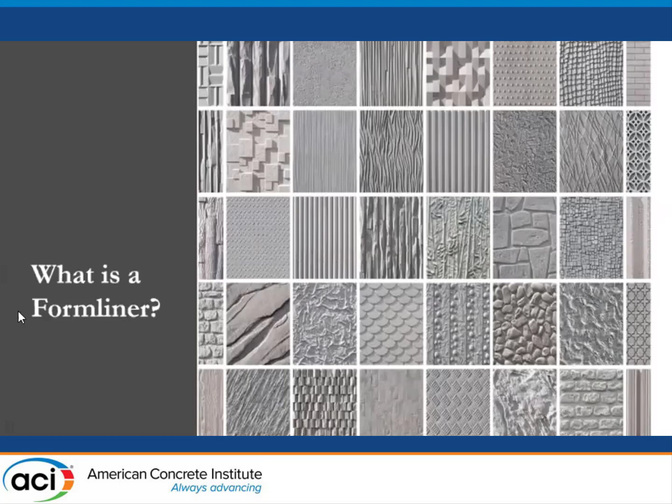A Formliner is essentially a mold. I've told some people, think of it in terms of the old Jell-O molds, when you want Jell-O to take a certain shape. But in this case, of course, we want concrete to take on the shape so that we make concrete look like something other than typical concrete. It's used to achieve a variety of designs. It can mimic virtually any traditional building materials. And you can also create a lot of artistic impressions.

From an architect's standpoint, of course, it's the way that we help you create your aesthetic vision, because we want you to look at the concrete and look at the finished project as being art. And I want to show a few projects that we've helped architects achieve that with. This is a custom project from Fremont, California, and it uses several standard Formliner patterns along with some customization. The images were CNC'd in this case.

And I tell a story about this one. I was told when this project was in development that it was in Fremont, California. And when I said I didn't know much about Fremont, they said, you know, this is Tesla. So for the next 2 years, I told everybody I was presenting to that we had a Formliner project with Tesla, only to find out when I was having dinner with the colleague that had this project after a couple of years that this is actually about a mile from Tesla. So it's not nearly as impressive as it was when I put it in the presentation, but it's a nice custom project and I still like to keep it in here.

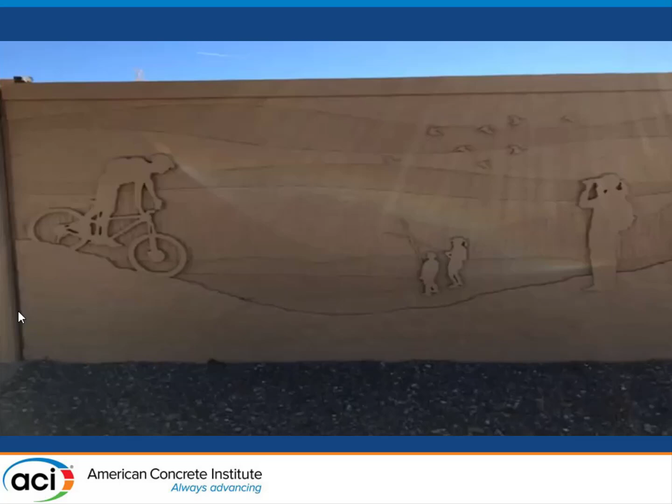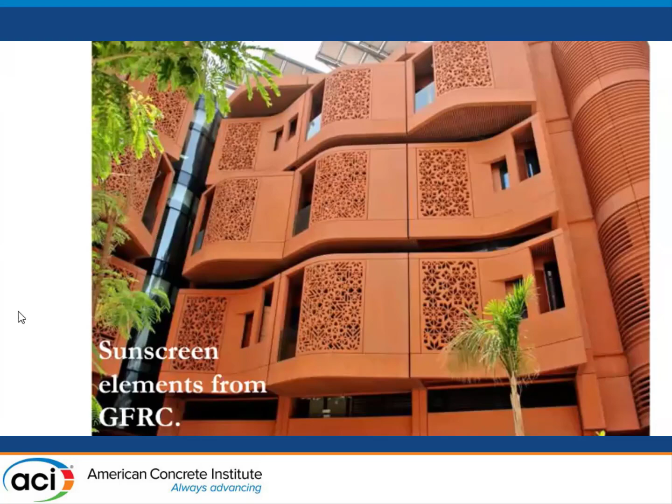And this is a dormitory in Abu Dhabi. And this was using GFRC. And actually the way this is created and the way that it's environmentally friendly, there is no air conditioning in this building. But this is a facade created for a dormitory. And GFRC is just one of the concrete types that you can use Formliners with.

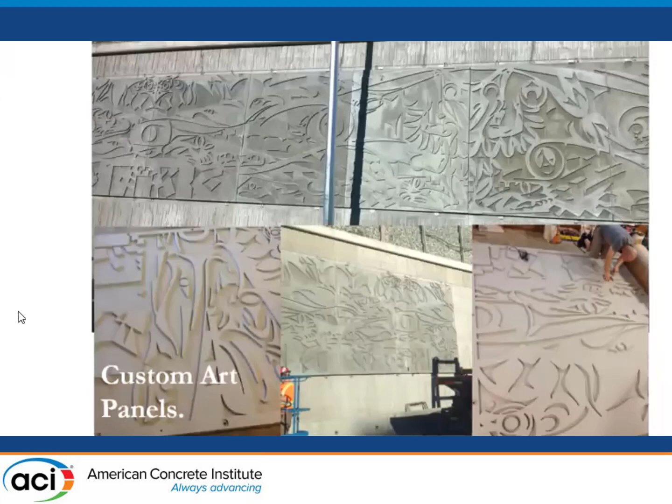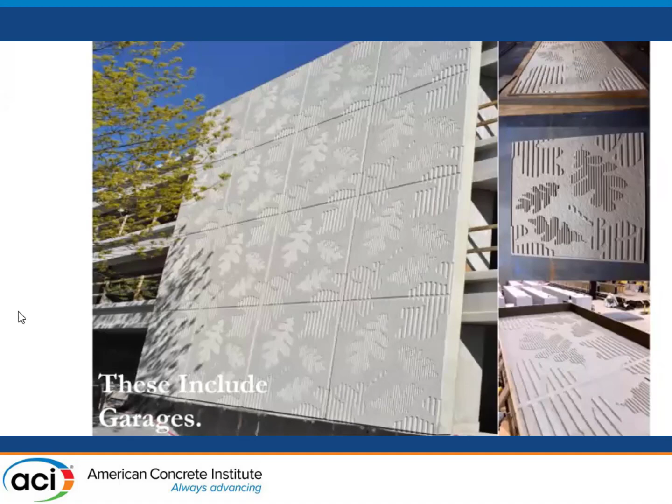Now, you've seen some of the things Formliners can do. Let's look at some of the popular construction applications for Formliners. Formliners are used in a wide variety of projects that you may or may not have thought of before. One is garages. We see quite a few garages, parking structures that use Formliners to give them a stronger aesthetic appeal. And that's what was done here using the custom Formliner pattern.

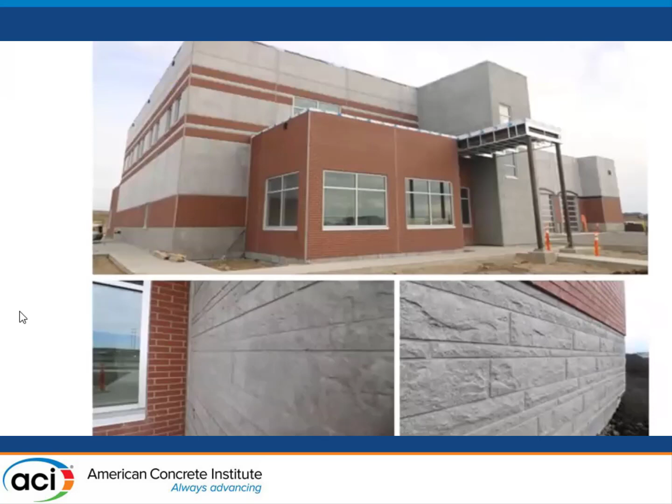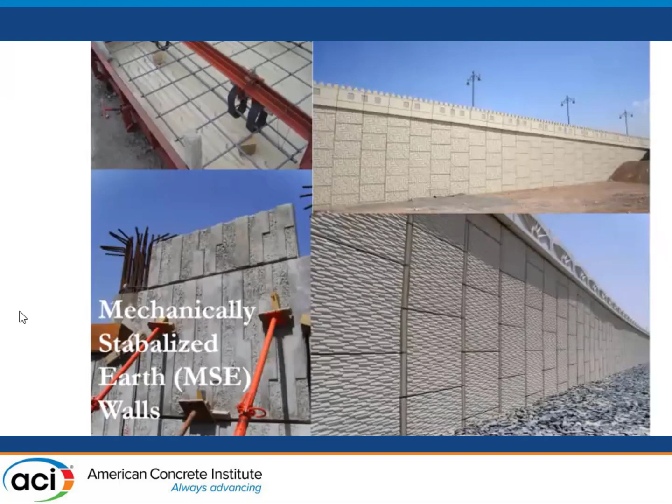MSE panels. These along the highways are very popular now. You see a lot of ashlar stone patterns used, some ribbed patterns, some different things, just so that it doesn't look like, I mean, you can tell it's concrete. This is an example of where the color is not essential to give you what you want, unless you want something that requires the use of color. But most of the times with the MSEs, you just get a pattern on the concrete color.

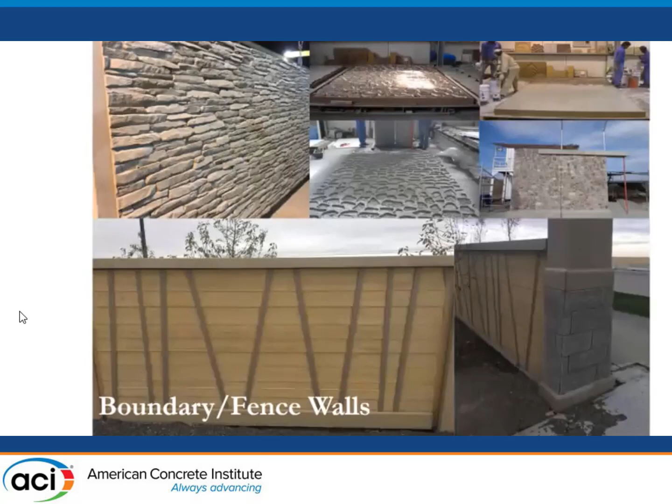Sound barrier walls with DOT. In parts of the United States, these are extremely popular. And you typically see them where there's a residential section adjoining an expressway, and they put the sound walls up to deflect the noise. And it's good if it's a decorative pattern.

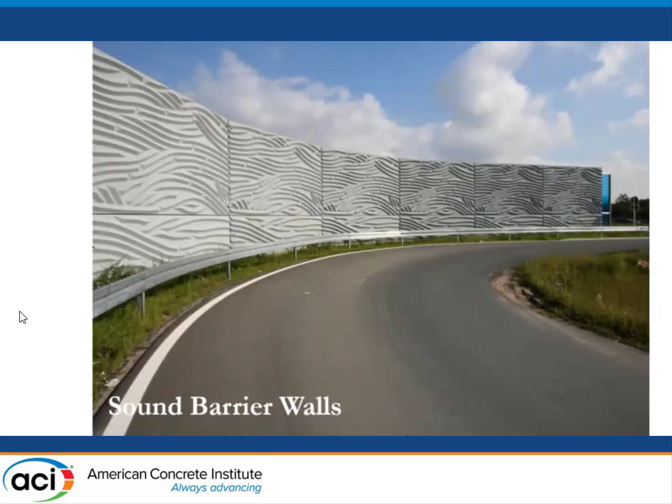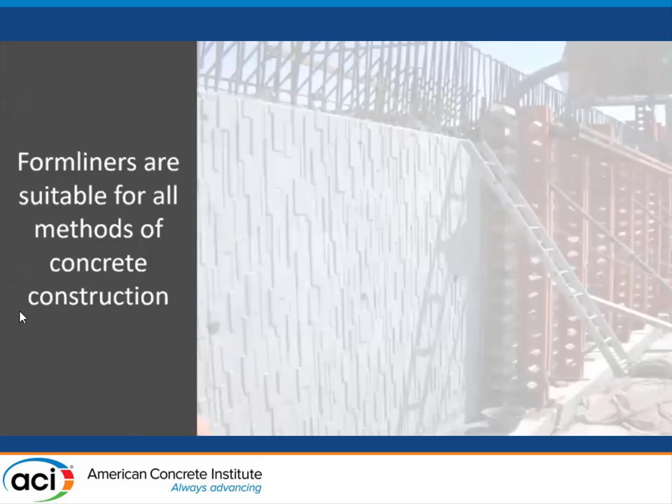Now, we looked at some of the type projects Formliners are used for, but what types of concrete construction are conducive to using Formliners? And then we'll talk about what type of Formliners you use with each type of construction. Tilt-up panels. This is something in tilt-up you might not have thought of using Formliners. You typically think of using them with precast, but it's a perfectly good application to use them with tilt-up panels.

And you can see in the bottom right-hand corner a staining crew applying stain to the building to give it the authentic brick and stone look. And with our sister company, Nawkaw, the crews actually come out and apply the stains themselves because it's often a multiple step approach. You have a primary color and then a lot of accent colors to give it a natural appearance.

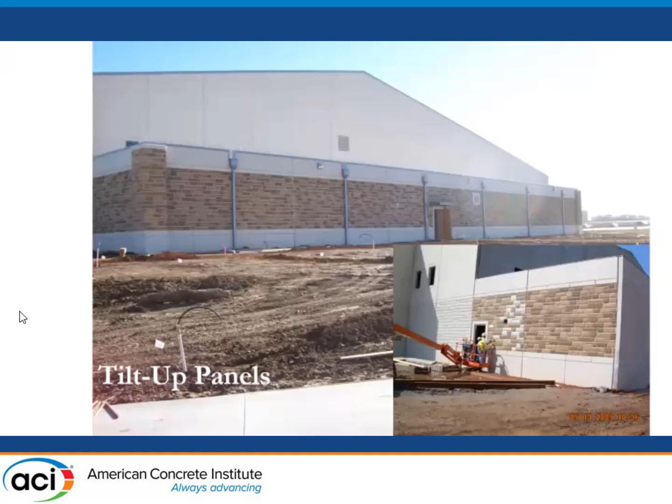In terms of types of Formliners, there are two types that we use: the plastic Formliners and the elastomeric Formliners. And I want to take a couple of minutes to talk about each type.

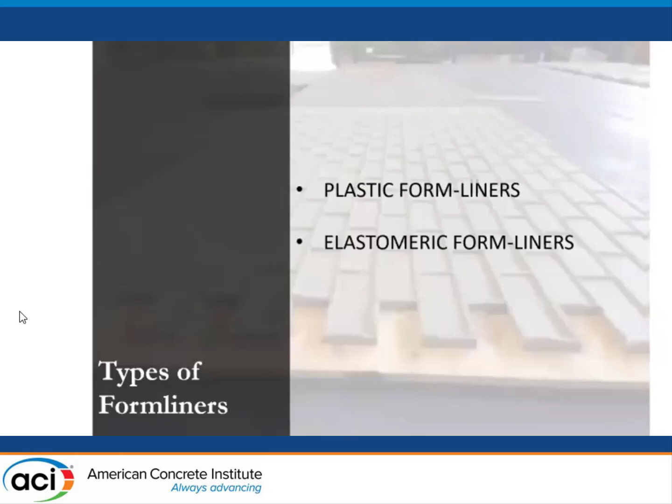With the plastic form liners, these are usually single application. You can get limited use out of some of the thicker plastics, some of the ABS patterns. These are made either of styrene or ABS. And in styrene, you think of that always as a single use. You're only going to pour on it one time. With the ABS, you can get up to 10 uses out of a panel.

With the plastic liners, though, you're limited to some pretty basic designs because you don't want anything that's too thick, because with plastic liners, if they're too thick, you're going to have to support them quite a bit because a plastic liner is hollow where you have a lot of relief on the back side. So if you're pouring concrete on that, the weight can tend to cause deflection, and we'll talk about how to limit that a little later on.

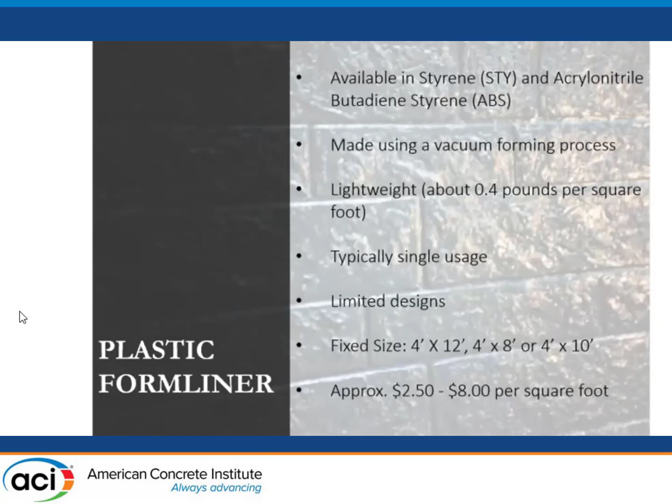One good thing about plastic liners is that they're the least expensive of all form liners. These prices down here might not hold true today with all of the supply chain issues we're having, but typically about $2.50 to $8 a square foot is your typical plastic form liner. Now, these are just a couple of examples of plastic form liners.

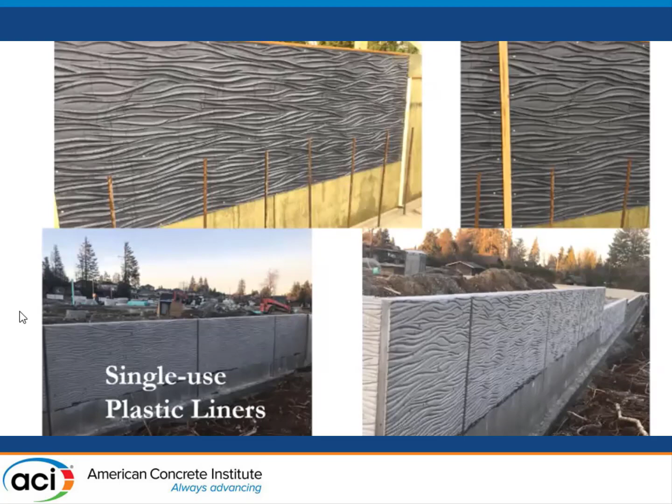And this shows some of the limitations and some of the strengths of the plastic liner. You can see the two pictures at the bottom. You've got a relief built into the project because the maximum size of this form liner panel is going to be 12 feet by 4 feet. So if you have a reveal every 12 feet, then you don't have to worry about the seam that would be there, because otherwise you're going to get a seam where the two panels join.

Now, elastomeric form liners, these are made of rubber, and to some extent they're flexible, stretchable. They can be used on a radius. They're very malleable. And these are available in high-use materials. An elastomeric form liner is designed to use many times. And they are very good at capturing detail. You can do almost any type of design using an elastomeric form liner. The only thing you've got to remember is the deeper the pattern, the more expensive the liner, because the deeper the pattern, the more rubber it takes to create the liner.

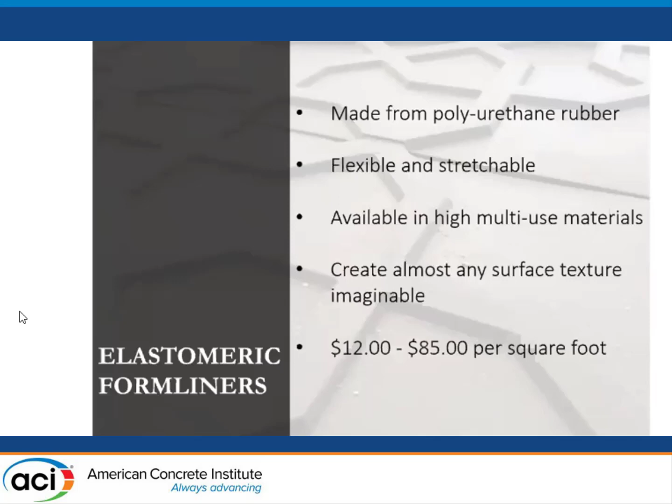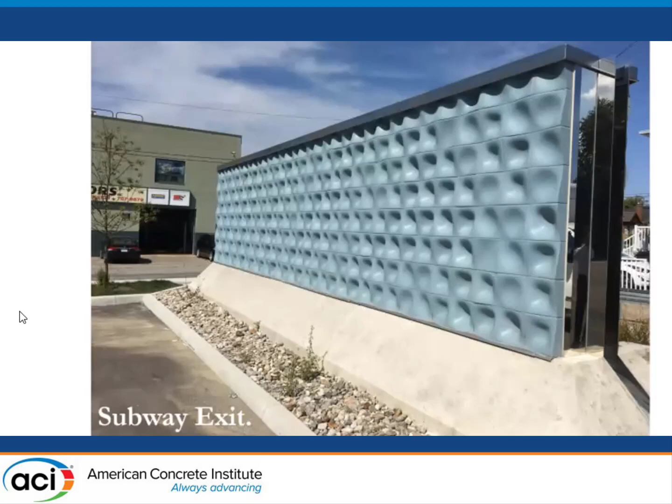In a tight area, if you're using spans that are less than 12 feet per wall, it might be perfectly good to use plastic because the seam's not going to matter. But if you need to get a 30-foot span, you're going to need to use urethane to minimize the appearance of your seams.

Now, we talk about standard versus custom patterns. And what we mean by this, a standard pattern is a pattern that you could call our company, and we could give you a quote on that standard pattern if we know what size you're using and know a few things about your project. We can quote that pattern outright because these are patterns that we have masters available for.

All Formliner companies that I know of make their urethane Formliners to order. They don't keep any in stock, but they have the masters there available. So it's always faster to get a standard project than a custom project. And with us, we have between 250 and 300 standard patterns to emulate stone, ribs, some abstract patterns, some stucco and concrete wall type patterns, smooth patterns.

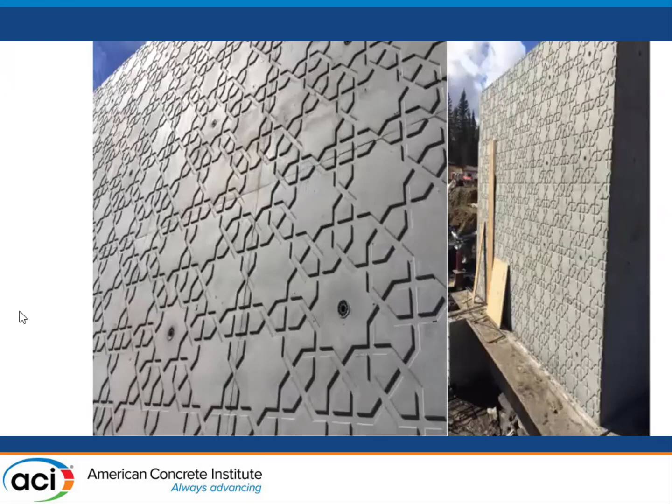But oftentimes an architect will want to go outside those patterns and do something custom. So I want to show you a few slides using standard patterns, and then we'll look at some custom jobs. Now, these are just standard. This is a standard abstract pattern. This is a standard wood pattern.

Some of our patterns go 25, 30 feet. But not all of them do. The urethane patterns are variable sizes, but within the size of the master, you can get any size you want. So if one goes 10 feet tall by 20 feet wide, you can get anything up to that without it being a custom pattern. Anything above that, we would have to add on to our existing master and create a custom pattern, or what we call a semi-custom. It's where we take a standard pattern and enhance it in some way to meet the specs. This is another standard pattern.

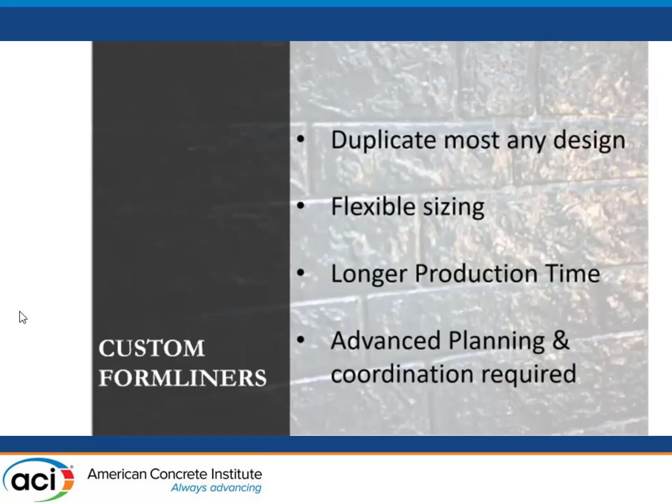In spite of the fact that we have a large number of standard patterns, about 60% of our production are custom patterns. And again, one of the strengths of custom patterns is that we can duplicate most any design. We're very flexible in sizing. It does take a longer production time, though, and it requires more advanced planning and coordination to achieve the results that you want to achieve. We've got to make sure that what the architect envisions is what we envision when we start to produce it. So it requires quite a bit of planning back and forth.

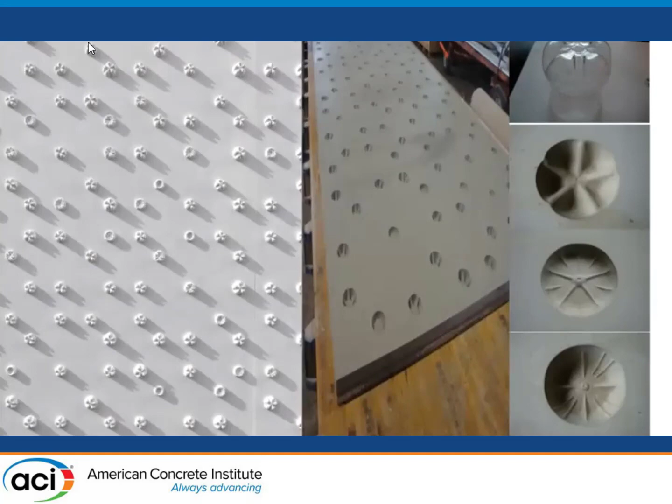We took rubber, and while the rubber was wet, created the impressions of the bottles. And then we poured on that. And as you see, you can see the negative to the right, and we would pour on that, and it would give you the positive protrusion there for the museum. So this is a very unique, very creative idea, and it didn't require a lot in terms of special materials to come up with that.

This is a landscape wall that appears to be 3D. We do have 3D concrete. This, though, it's all visual. It's not 3D. It's using a standard pattern for the background and then just smooth Formliner for the steps.

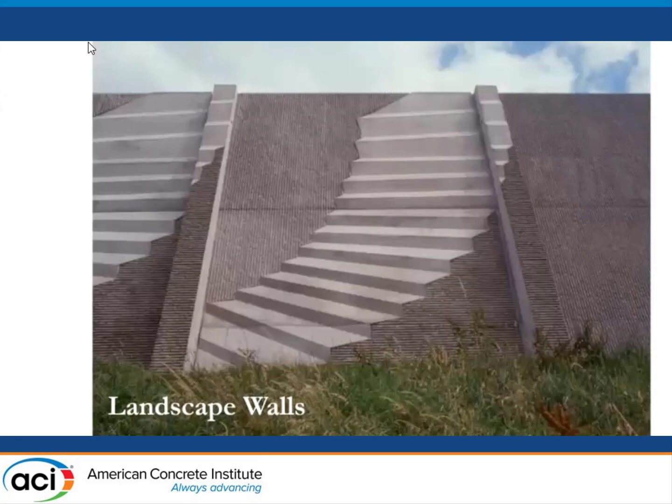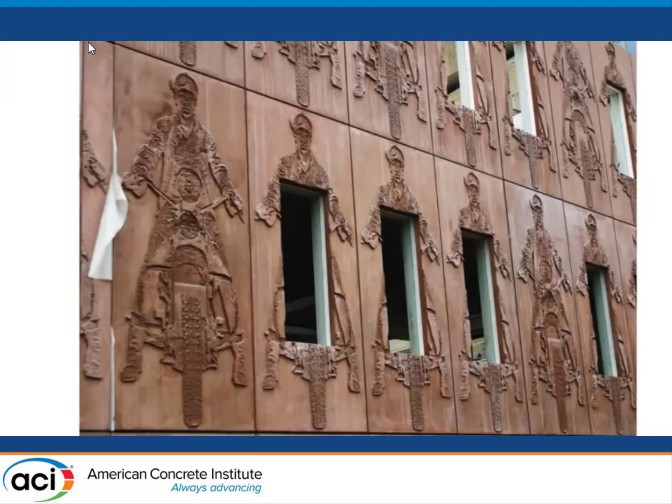This is an example of a 3D concrete pattern. This would be done either with CNC, or an artist might use clay or some other materials to create it. What we're looking for is any surface that we can pour on, any medium that would create the image that we're looking for.

See, I went one too far.

Sometimes we're doing historic preservation or a restoration where it's important to create something new that is identical to something that's already in existence. And when that's the case, we can go on site and actually use rubber to paint on a section of the wall or whatever it is we're trying to reproduce, creating a Formliner that we can then take back to the shop and pour on. And with a combination of the Formliner and stain, we can have a continuous wall or a continuous structure that combines the old and the new.

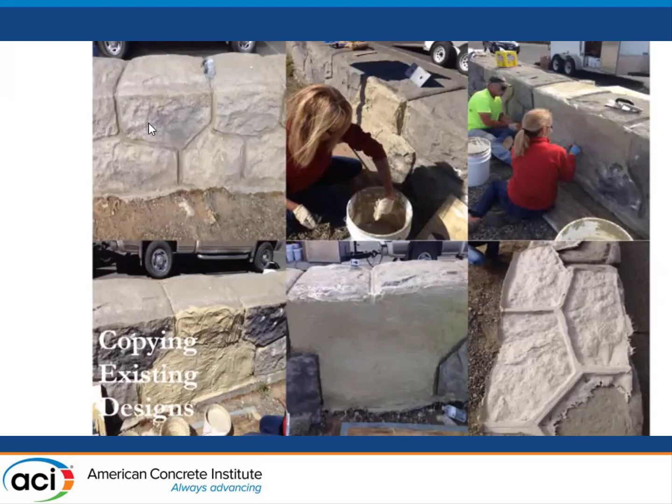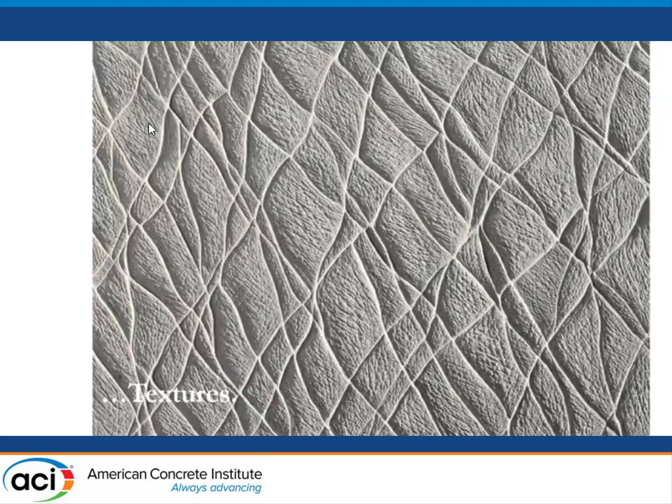Now, I want to show you the production process, how we would go about making a custom liner from conception of the idea through getting it onto the facade. And there's probably better examples to use, but this is the one we had available. Let's say that your idea was that you want to put an impression of coastal grasses on a building facade. You want the building facade to have an image or create the impression of coastal grasses. Maybe it's a changing building out near the beach or something of that nature.

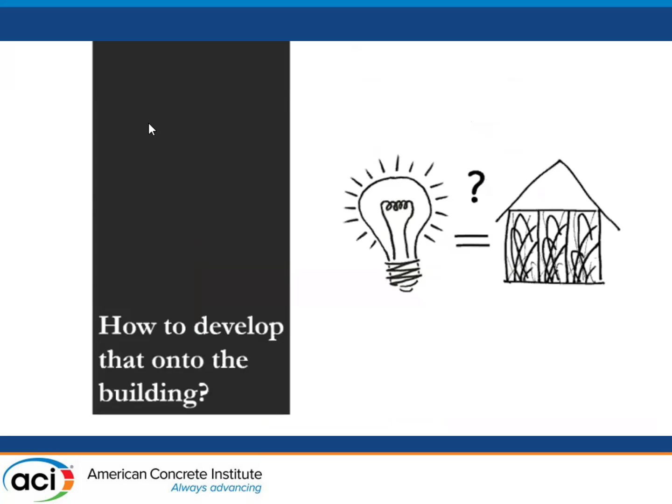So how do we develop from idea to getting the appearance of the coastal grasses onto the building? Well, the first thing we do is we look at the coastal grasses and we come up with a design and create CAD drawings. And then these are converted to 3D models where we then bring it back and show you and say, okay, does this seem to capture what you're wanting to capture in this design? And then the drawings are converted to CNC software for cutting of the design. And then the design is cut onto blank panels to create an impression.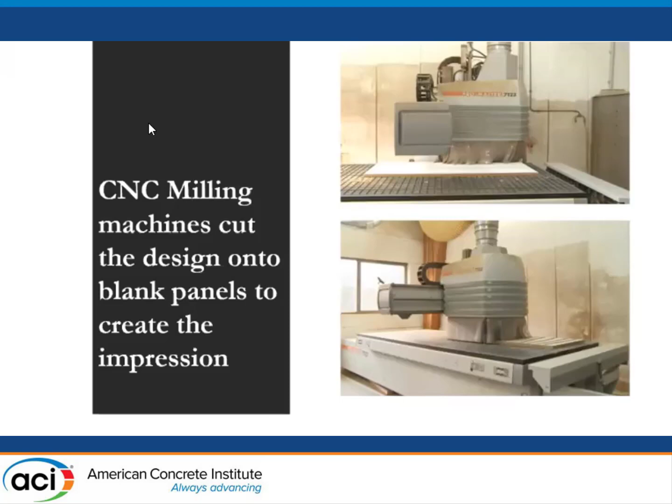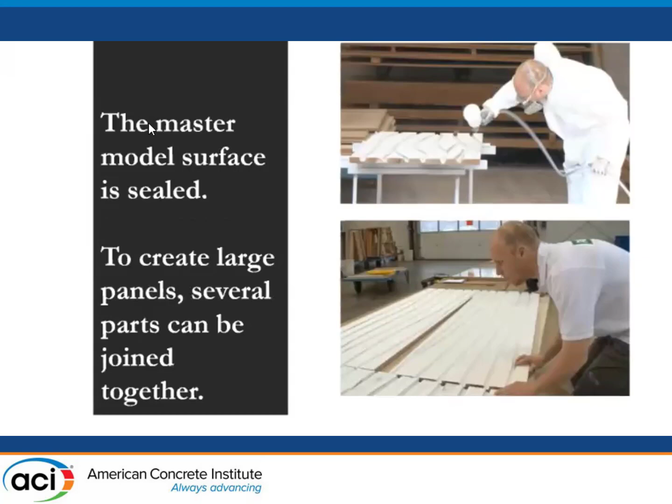And with the CNC machine, of course, it creates a finite size panel. The one we have in the shop currently does about 10 feet by 4 feet. And oftentimes you will need a bigger surface to create what you're trying to create. And when that's the case, you do it in separate panels and you seal the surface, join the panels and make it as big as you want to achieve what you're trying to achieve. Then the master mold that you're going to pour on is framed.

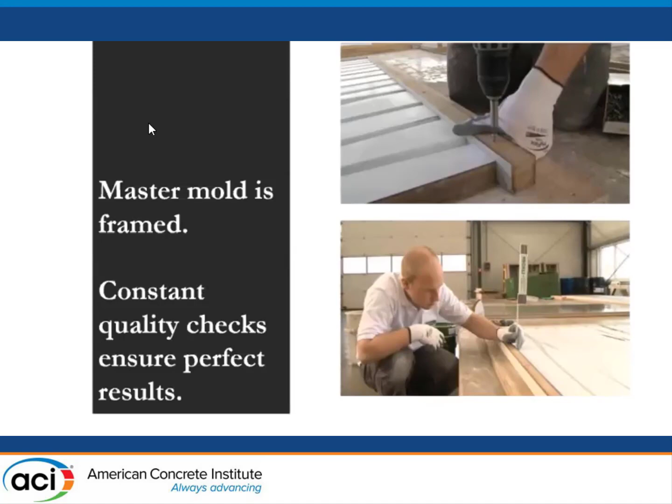And throughout everything we do, at every step, every juncture, quality control is extremely important because we have to make sure that there is no imperfection in anything that could show in the concrete or that could create any sort of disruption. So at every step, there are quality checks to ensure that everything is as perfect as possible.

When the master is finished, it's sprayed with a mold release, sprayed or brush coated. It could be either one. But you put a mold release on, you wait for the mold release to dry before you cast rubber. And you want to make sure when this mold release dries, it's going to have a waxy feel to it. It's going to feel as though you've got a coat of wax on the master.

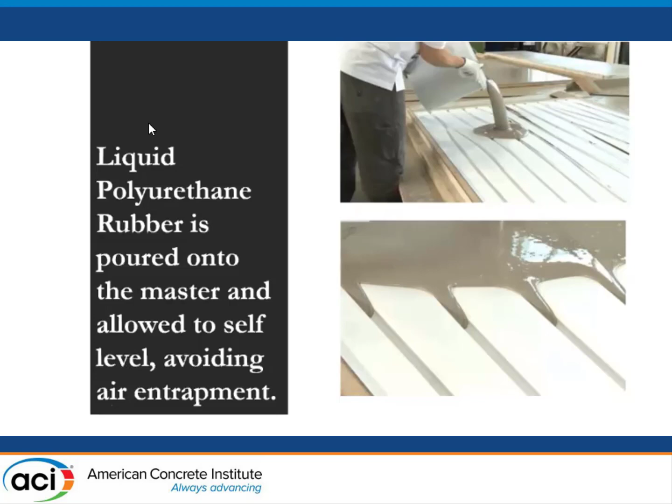Then you pour the urethane. Now this is self-leveling urethane, and it also has a very rapid hardening time. From the time you pour the urethane until it hardens is about 25 minutes. So in some cases, you have several people pouring simultaneously, depending on the size, because the idea is to get everything poured and screeded before the rubber starts to harden.

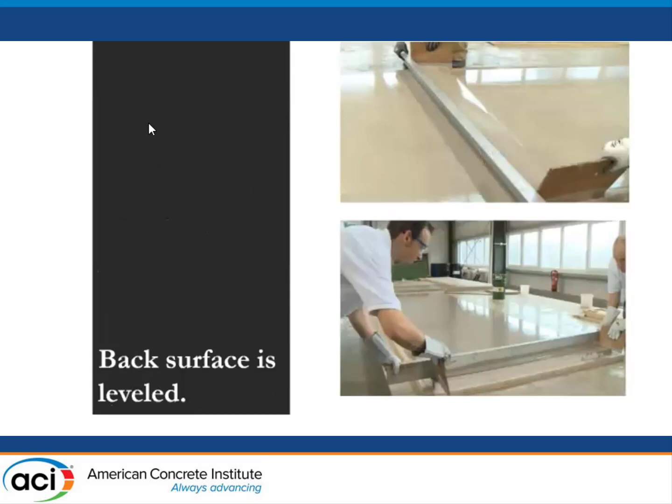And as you can see, this has been screeded. The back surface is leveled. And after 24 hours, and in some cases slightly less, but you want to leave it down for close to 24 hours, then the liner can be demolded. To the touch, it's going to seem dry, but this will continue to cure for several days. So we would leave it lying flat.

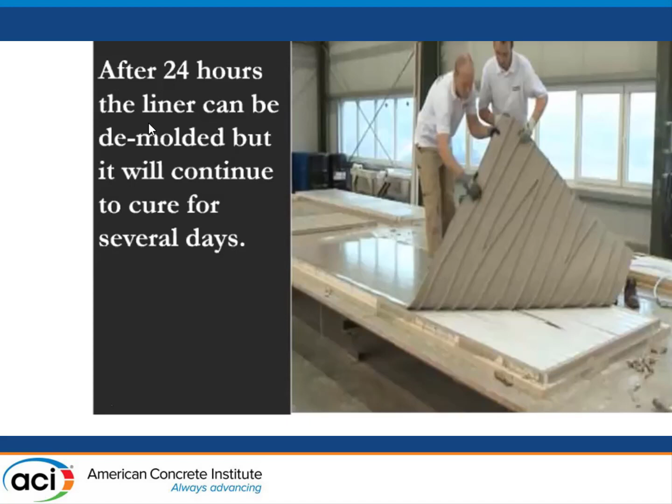A lot of times a customer will say, if you pour 5 liners this week, can I get 5 liners on Friday? And in most cases, the answer would be no, because it's going to take longer for those liners to cure than the pouring process took. And even though they appear to be dry, there could be some damage to the liners in shipping if they're shipped before they're perfectly cured.

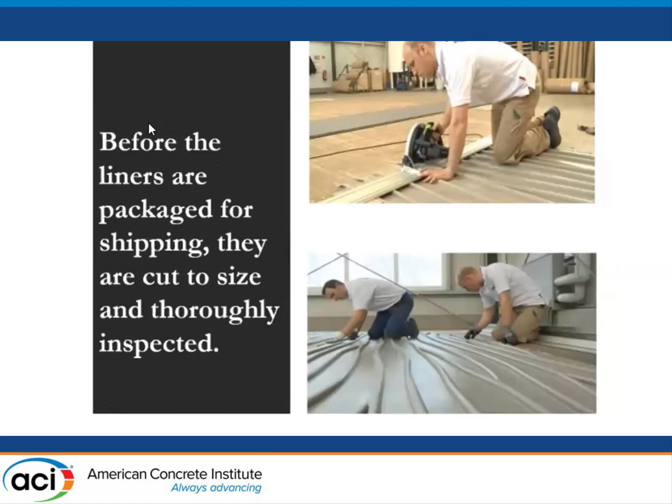And before the liners are packaged, they're cut to size and inspected once again. The more sizes of liners you use, the more framing it requires and the more time that it takes. But we will cut to any sizes that you want. We just finished a project that used the same patterns but had 51 different sizes of Formliner. So that's another step in the process that needs to be figured in terms of how much time it's going to take to get the liners for this project.

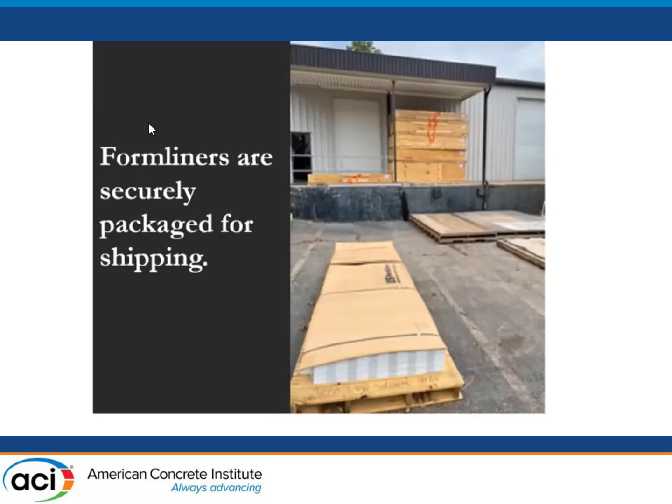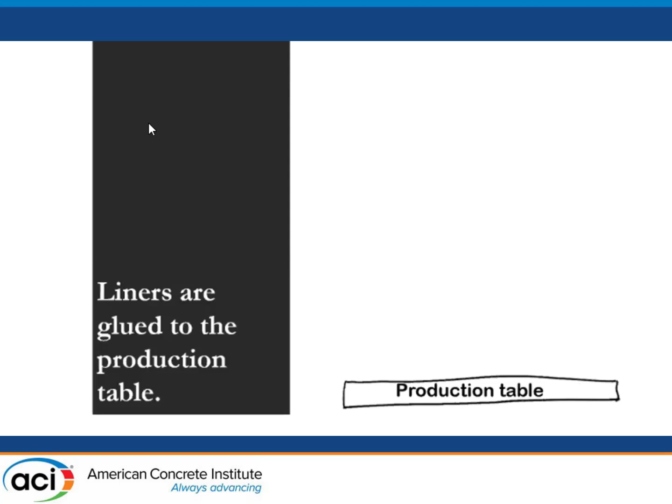So once we finish with the liners and we ship them out to the customer, then we start, in this case, we're going to describe a precast process. We have the production table, and in some cases, the customer will place glue directly on the production table and then place the Formliner directly on top of that to get adhesion so that the Formliner will not come loose when it's poured on.

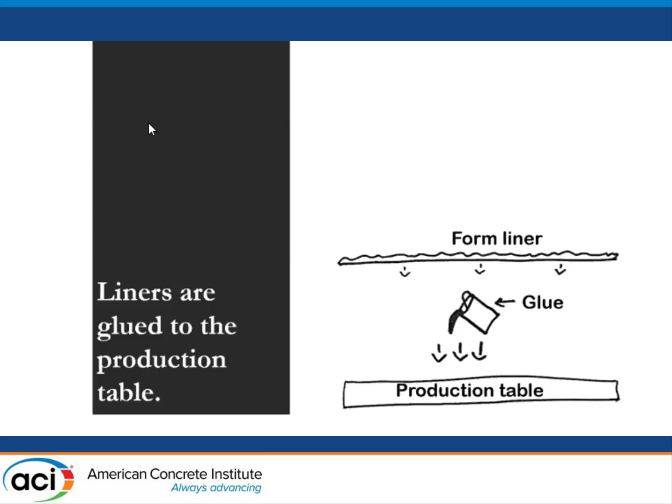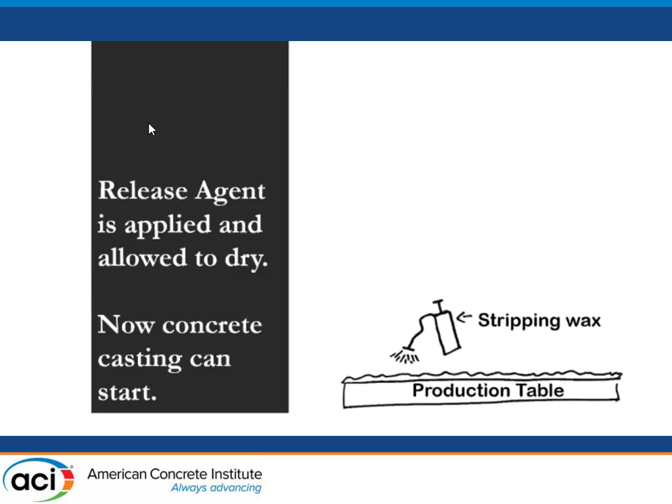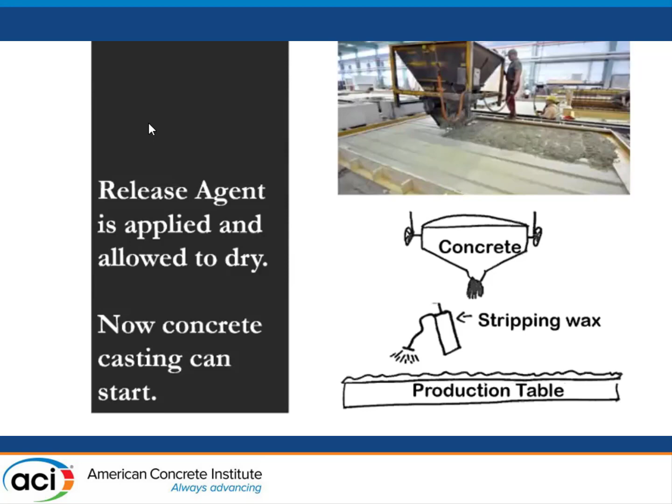Then when you have the Formliner in place, you apply a release agent, just like when you were pouring the Formliner on the master, except you're using a different stripping wax. But once again, you brush it on or you spray it on, and you allow it to dry. And once it's dry, you're ready to pour the concrete. And there's a picture from a precast plant where they're pouring concrete on the Formliner surface that we want to use for our beach grass.

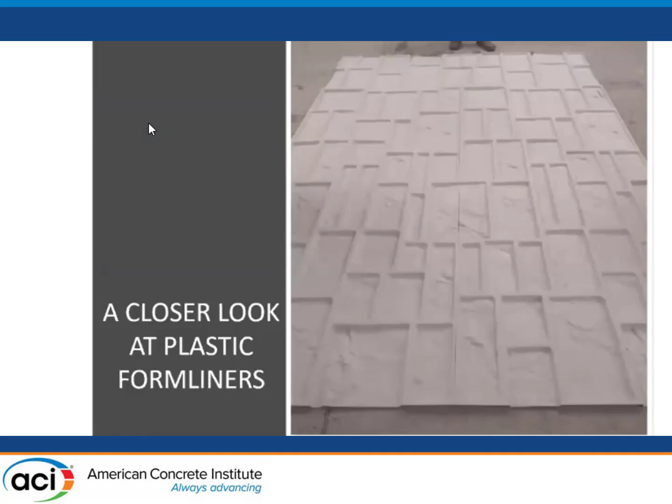Now, I want to show a film to take a closer look at plastic Formliners. And in the event that this film does not show correctly, stop me and we'll check something. But I think it's worked in practice sessions.

We want to show you going from the Formliner master, this is a kiln line master, to applying the plastic and going through the thermoforming process that ends up with Formliners.

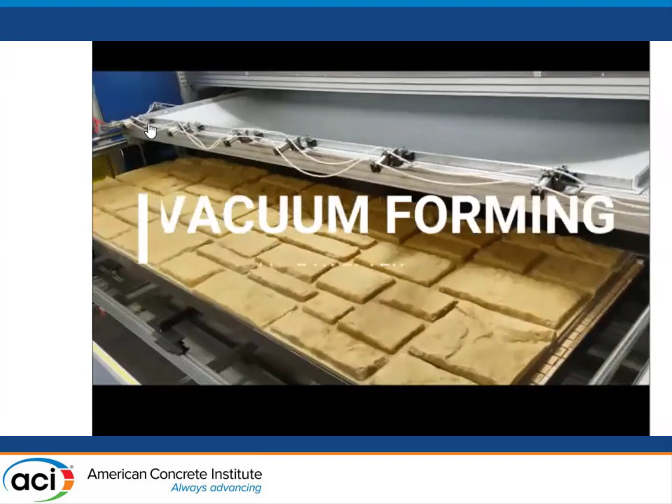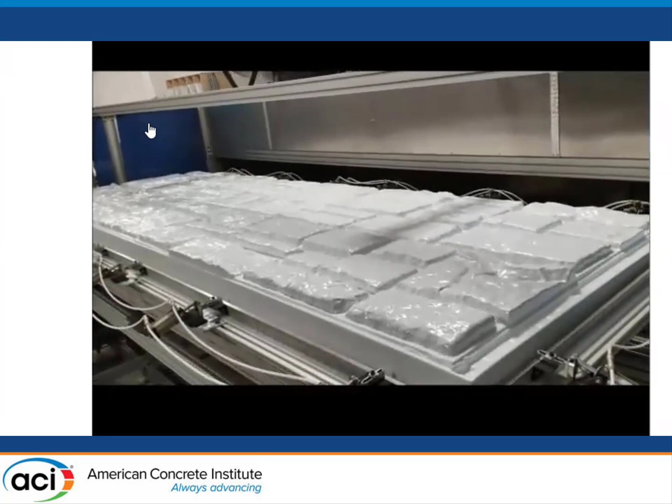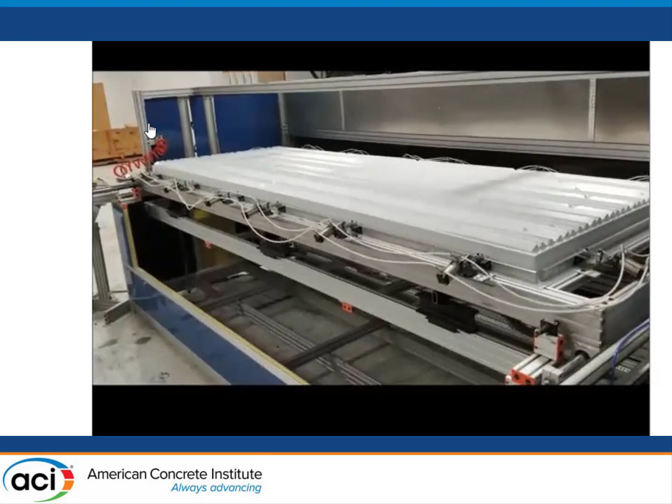Okay, this is in the thermoform machine. A plastic meets the kiln line master, and there are a number of holes you'll see in a minute in these masters so that the heated plastic can be sucked into shape. And this is just showing it from another direction.

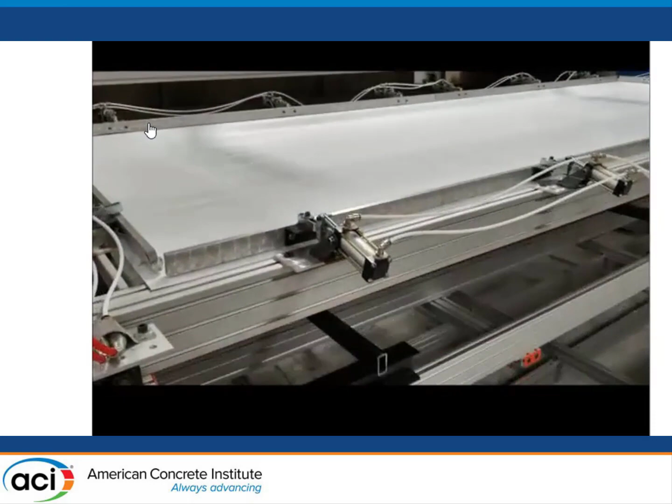And I stopped the audio on this because it was some of the most atrocious music I've ever heard. And it was something developed in our workshop, and they did a pretty good job of the photography, but a horrible job of the music. So I killed the audio on it.

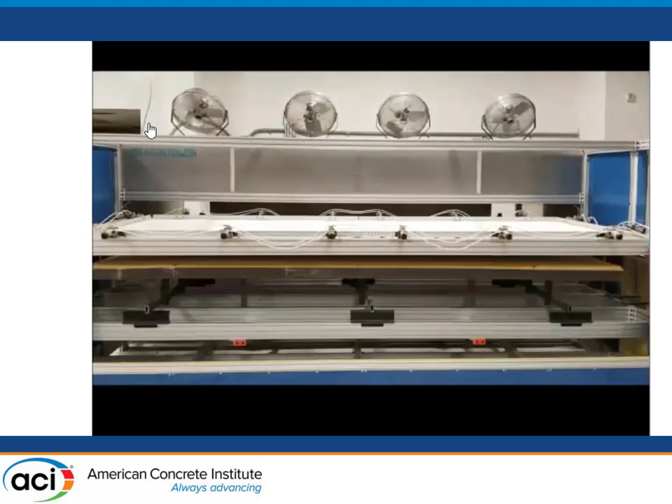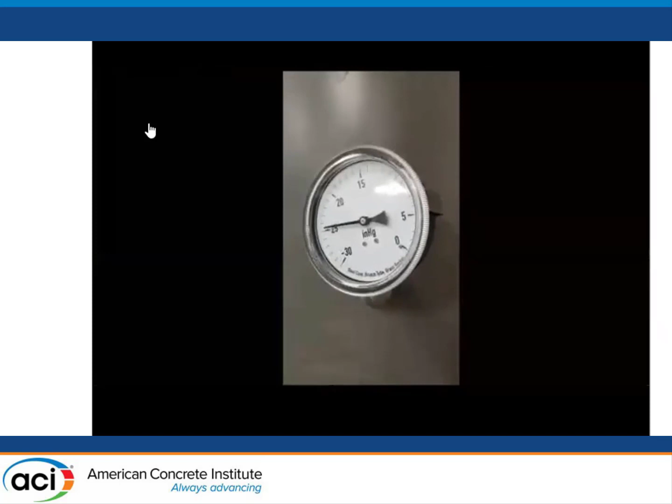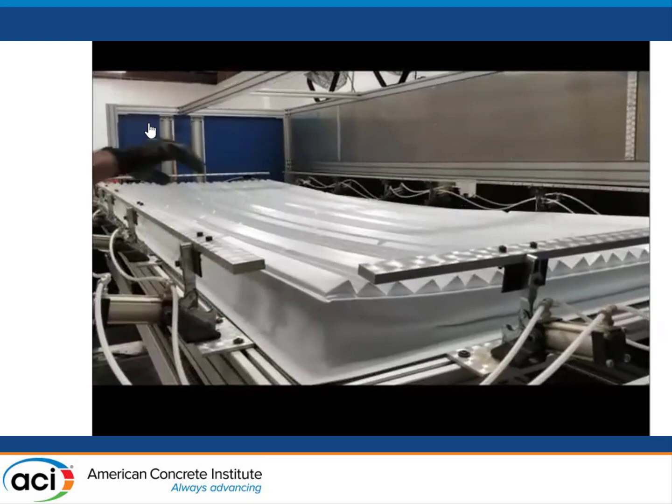But you can see that being sucked into place through the air hose. It takes different amounts of time depending on the thickness of the plastic and whether you're using styrene or ABS. For what we call a Sty 60, which is a medium density plastic, it will take about 90 seconds to create the raw plastic liner. And when it comes out, it looks like this, and the edges have to be cut away.

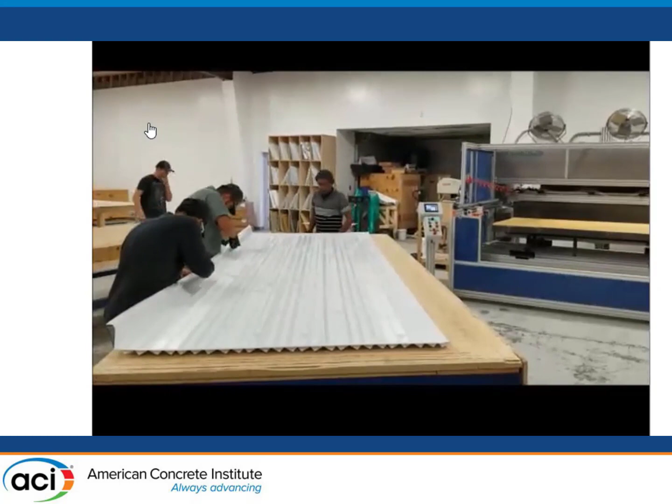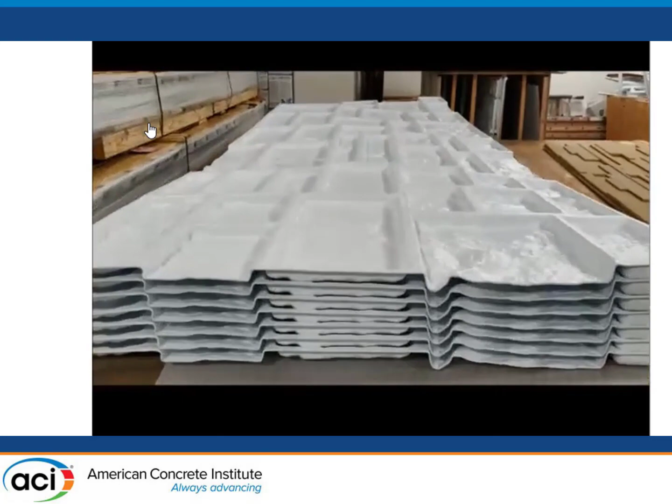And with our thermoforming machine, the size Formliner you're going to end up with is going to be close to 12 feet by 4 feet. It can vary slightly depending on the particular design and the depth of it.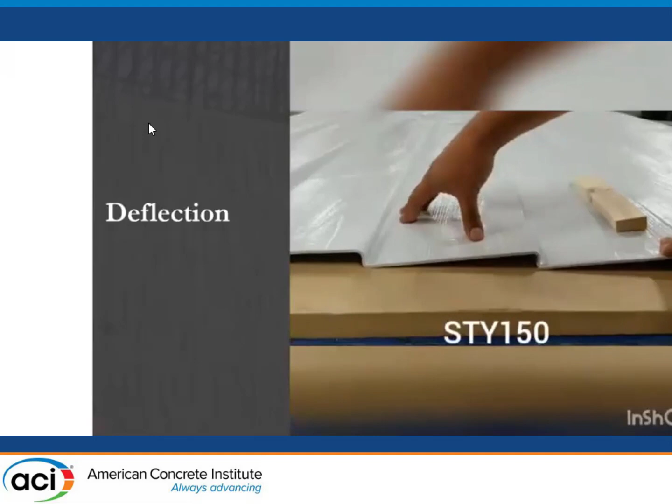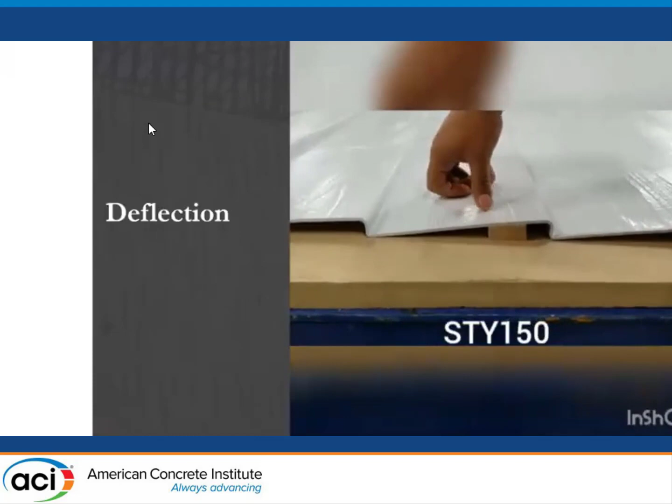And remember earlier we talked about deflection. One of the drawbacks to plastic liners is that they're hollow where they have relief. And as you can see in this little video, where they're hollow, they're flexible. So to prevent deflection, you need to put some sort of a brace there. And you can do a variety of things. You could use plastic, you could use wood, you could use foam. Different customers use different things, but it is important that you protect against deflection, particularly with cast in place.

Mainly with cast in place, you're not going to have as much pressure probably as you move up the wall. Down toward the bottom, you're going to have the most pressure because the concrete's going to be compacted more down there.

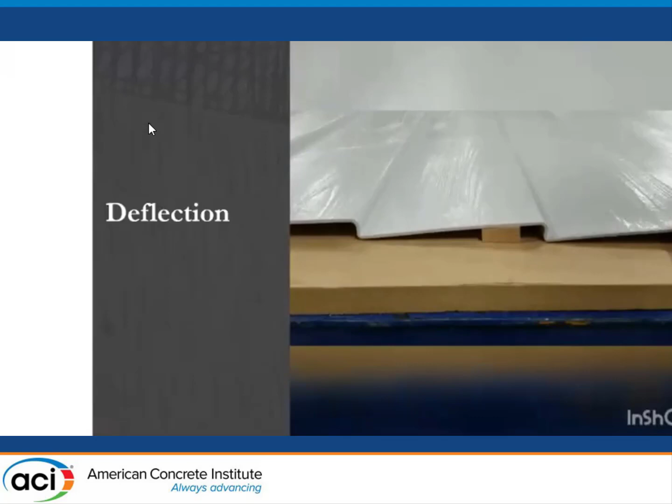People ask a lot about using liners on a radius, and plastic can be used depending on the pattern. Plastic can be used to some extent on a radius. If you're going to get much tighter than the curvature they're showing here, though, you're probably going to want to use urethane because it's more malleable. If you try to get plastic into too tight a radius, it can crack.

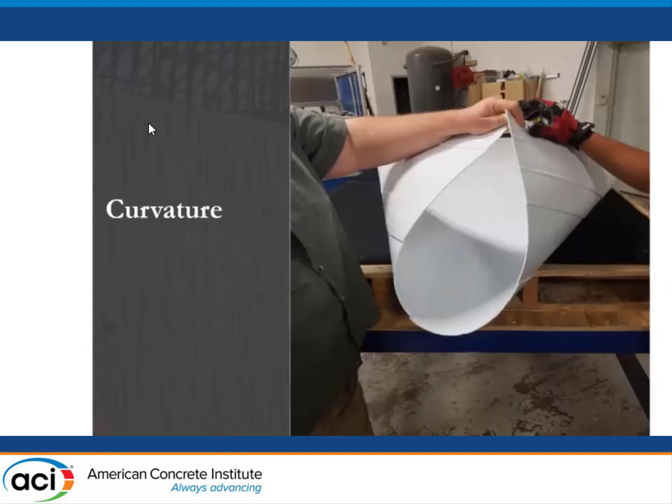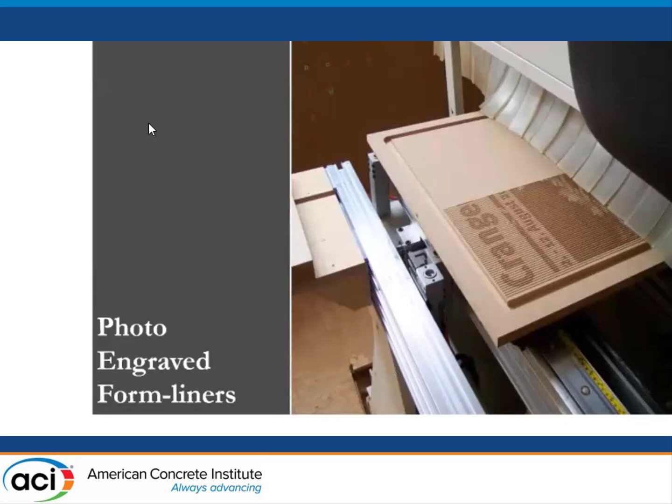Now, we've got two methods for transferring photos or artwork on the concrete, and I want to talk about these for just a moment. You saw the picture earlier of the photo engraved Formliner as it was finished. I want to quickly look at that process. We start with a picture, and it can be any picture, color, black and white. It could also be any artwork, any geometric pattern or a painting or whatever.

But we use angles to change a color picture or whatever type of picture into 256 shades of gray. And these shades of gray are not actually achieved by any color process. It's all done through angle and depth of cut. The computer converts the info into CAD, and then you mill the master, and you can see the little striations there.

The cuts are used to create the image. And this would be the negative of the image that you want to have on the concrete. This is your master. And it would be formed up just like we showed for the beach grass. You would form this up to pour concrete on it. You would treat it to pour the rubber on it. You would take that master, you'd pour a Formliner, then you would take the Formliner and pour the concrete on it, and this would be the result in the concrete.

Now, there are some things to know when you're trying to pick a visual depiction in concrete, when you want to look at pictures or something in concrete. I'll show you a couple of photo engraved projects. This is a warehouse. They used the photo engraving process to create a forest.

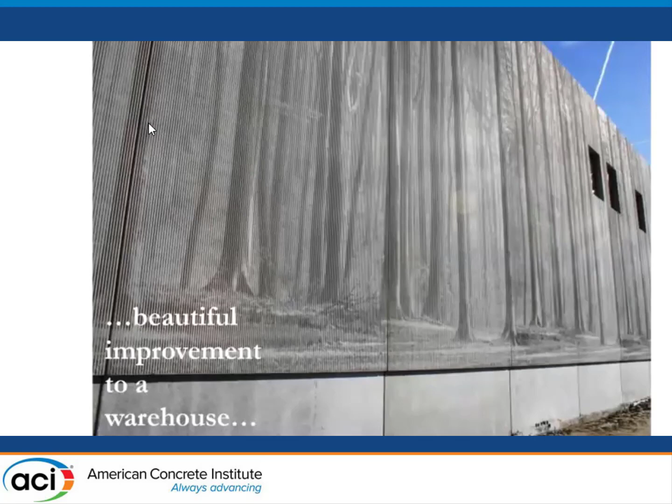And an interesting thing about this warehouse, this was in a community where across from the warehouse, there's a very dense forest. And there was quite a bit of controversy in the neighborhood over erecting a warehouse in such close proximity to the forest. And as a compromise, they used photo engraved concrete to create the impression of a forest on the side of the warehouse. And so it was more aesthetically pleasing, and the folks who were upset about it were a lot happier with the warehouse in this shape than just a plain warehouse.

Now, the thing about the photo engraving, though, is that it's only visible in certain light and at certain angles. If you approach the building from some angles, you won't see the image at all. If you approach it from other angles, the image will pop. The same thing with certain light. In certain light, the image will pop, and in certain light, you won't see the image at all.

So this is used when you want that surprise element, when you're walking up on the photo and it just jumps out at you. If you want something that's more continuous, something that you will see from any angle or in any light, and you can create that in one application, you would look at our Artico process. With the photo engraved Formliners that we just saw, you can use those hundreds of times. You can pour on them hundreds of times.

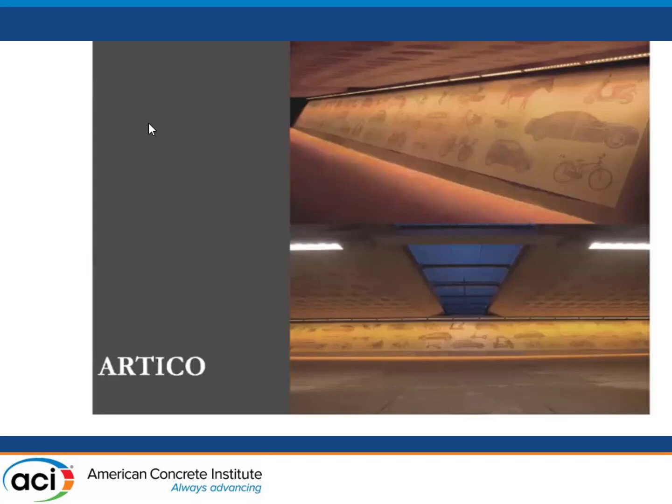And I should say too, with the photo engraved Formliners and with Artico, these are only practical when doing precast. You wouldn't use these applications on cast in place. I had that backwards at first. Only when you're doing precast would you use Artico or the photo engraved Formliners.

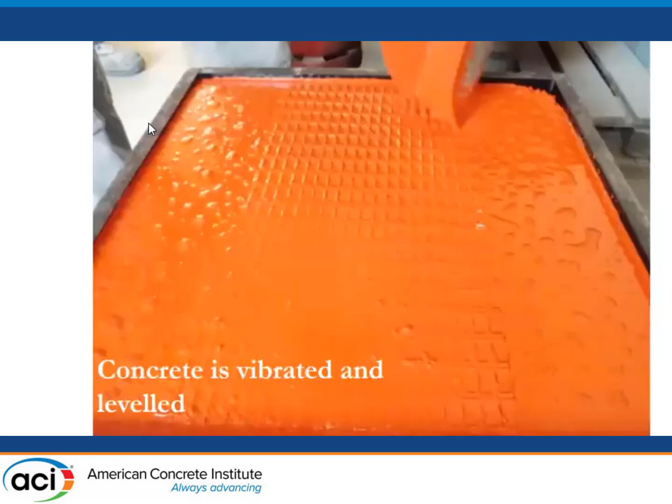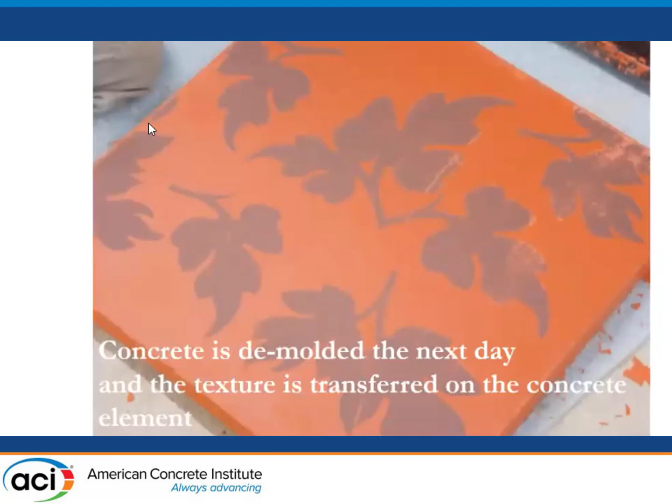But you pour the concrete directly on the image, and the concrete is vibrated and leveled. And the next day, you would demold it. And if you see some of the little dull areas there, when this is first demolded, you're going to see the image to an extent, but it's going to need to be power washed to clear away any of the residue so that you get the image in more clarity.

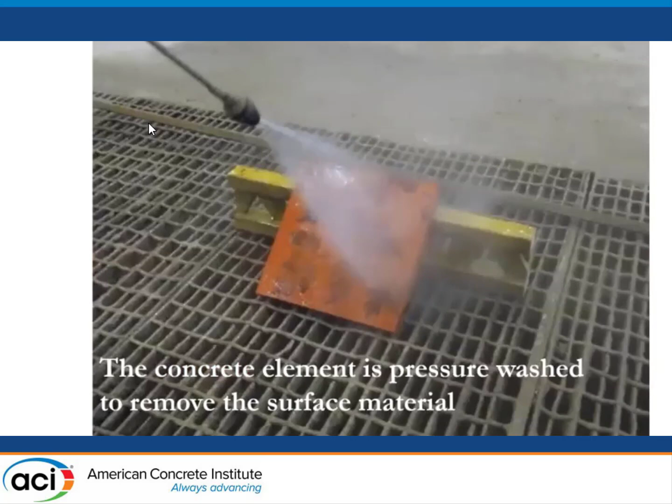Now, one good thing about Artico is you can do enormous murals or walls with this. It's made on rolls, and one roll of Artico can cover an area that's 11 feet tall by 82 feet long. Or you can reverse it and have an area that's 11 feet wide and 82 feet tall. It can be used either way. And there are a lot of creative ways to think of this.

Although you can only use the Artico plastic for one application, in quite a few instances, the customer doesn't need this much surface, 11 by 82, to create their image. So they might purchase a roll and have their image repeated 4 times in case they want to use it again, because sometimes they will find something that they'll have a use for later on, or they might just want to have a duplicate.

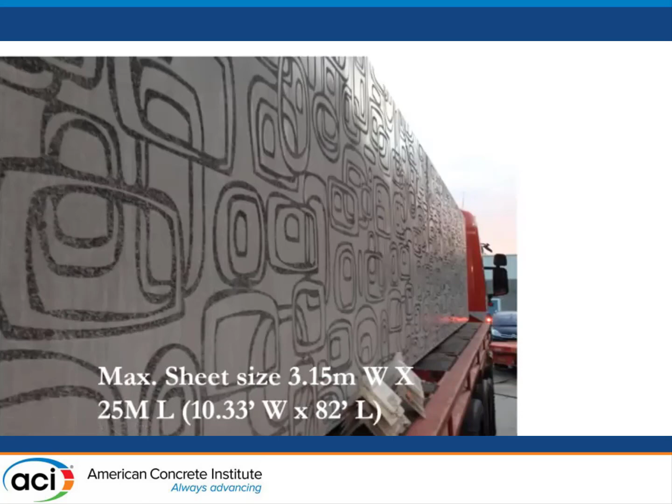I know we did an Artico project for Middle Tennessee University, and the precast company bought an extra image so that they could cast it on concrete and use it as a display in their yard at the precast plant.

Now, the thing about the Formliners is that the process takes longer than you think. As you've seen, as we've gone through here, I've talked about some of the areas where a lot of time is required. And a lot of times we have a customer that'll call and say, I need X Formliner, or I've got this custom project and we need it in 2 weeks. And we do everything that we can to accommodate that. But in most cases, it's not possible to take a project from origin to fruition in that tight a time frame. Let's look at the ordering process.

When someone orders a Formliner, we've got our lead time versus our production time. What we're talking about with lead time is once you're making the order, how much time is it before we can start the project? And the way the factory floor works is that there's only room for so many pouring tables on the floor. And if all the pouring tables are full, then the next project has to wait until one of the pouring tables is open. So we might tell you when it's time for you to order, it's going to be 4 weeks lead time. That means 4 weeks before we can start your project.

Then we have production time, which is the amount of time it will take once we start to produce your project from start to finish. Unfortunately, this is usually a shorter time than the lead time, especially since COVID has come into the picture. After you call us and we're making the order, we do the documentation. And we've got to be very exacting during the documentation process because, as you can imagine, we can be looking at the same pattern. Let's say we're looking at a wood pattern.

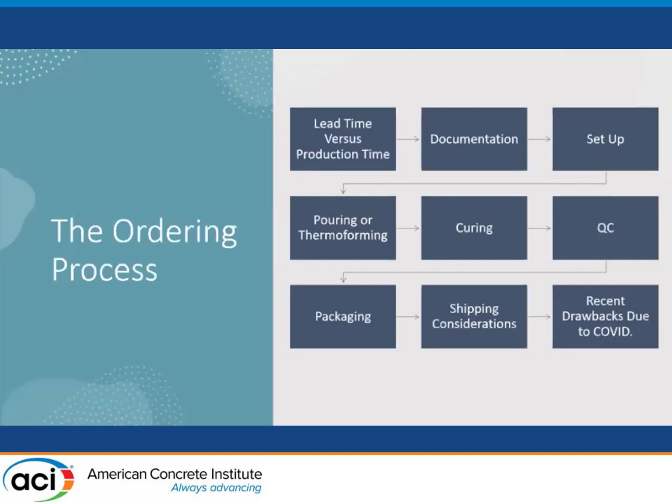And then finally, specifying Formliners. We love it when architects specify our Formliners. And we want to be as hands-on or hands-off as you would like us to be. But there are several things that we would like to help with if you want us to. One of the things is whether the pattern is custom or standard. You can look on the website, or we can send you a catalog and you can pick out any standard patterns that you want, or use several standard patterns simultaneously.

If it's custom, of course, it's going to take more time, and we want to make sure that we fully see your vision with you, and that the end result looks like you want it to look. With our standard patterns, there are some patterns in the catalog that have never been called for in the US. Though we manufacture in the US, we get a lot of our patterns from Europe. There are a few standard patterns that have never been specified in the US. We've never had a demand for them, and we don't have them.

That doesn't mean we can't obtain them. It just means that's going to add to the process, and it's going to take about 8 or 10 weeks to get a master from Europe if it's something we have to import. If it's something that we can make in-house, which some of our standard patterns we can, then it's going to take an extra 3 weeks. But it's a consideration whether we've got the master on the shelf, or whether we're going to have to make it.

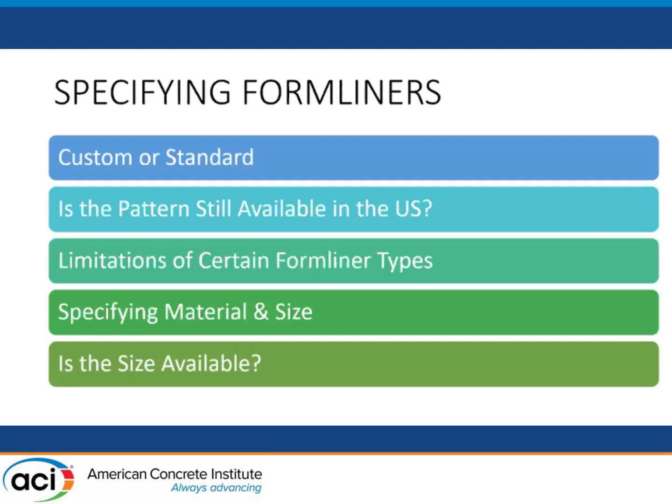In the shop, we shine lights on them. We've got some really good artists and do everything to eliminate the seam, but we never guarantee it's going to be eliminated, because certain concrete mixtures, certain admixtures, certain light can bring out a subtle seam. So we can minimize it, but never guarantee that it's going to be completely obliterated. And that's everything.